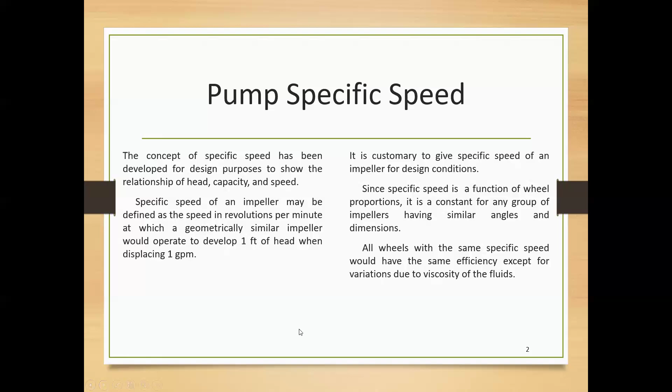There are two steps in the derivation of the specific speed formula. First, the speed of the impeller must be changed at constant diameter to reduce the head to 1 foot. Second, the dimensions must be changed at constant head or velocity to get a capacity of 1 GPM.

For a constant impeller, flow Q will vary as the speed N, and head H will vary as the square of the speed. So, N2 over N1 is equal to Q2 over Q1 is equal to the square root of H2 over H1. Taking subscript 1 to indicate the original impeller and subscript 2 the conditions after securing a head of 1 foot, N2 is equal to N1 times the square root of H2 over H1, and Q2 is equal to Q1 times the square root of H2 over H1.

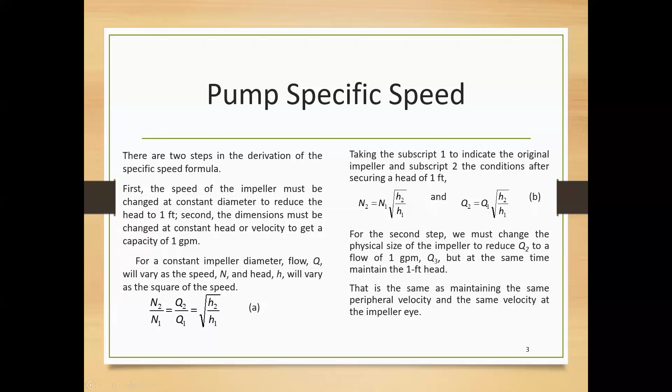For the second step, we must change the physical size of the impeller to reduce Q2 to a flow of 1 GPM, Q3, while maintaining 1 foot head. That is the same as maintaining the same peripheral velocity and the same velocity at the impeller eye. So the volume of flow will vary as area and as the square of the diameter. However, if the diameter is reduced, the speed must be increased to maintain an impeller velocity that will give the desired 1 foot of head.

Therefore, at constant head, Q2 over Q3 is equal to D2 over D3 squared is equal to N3 over N2 squared, where subscript 2 has the same significance as in equation B, and subscript 3 indicates the properties after conversion to 1 GPM. Substituting equation B into equation C, N3 is equal to N2 times the square root of Q2 over Q3.

So N3 is equal to N1 times the square root of H2 over H1 times the square root of Q1 over Q3. Remembering that Q3 is equal to 1 GPM and H2 is equal to 1 foot, Ns is the specific speed, Q is measured in gallons per minute and H is the head in feet for one stage. Q for a double suction impeller is taken as half the total flow, because it's per impeller, per suction. Okay? Right.

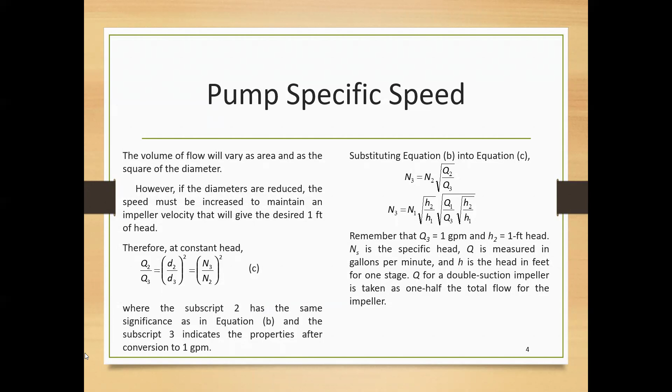So therefore, Ns is equal to N times the square root of Q over H to the 3/4. The specific speed for an impeller calculated throughout its head curve would range from 0 to infinity. Each type of impeller previously discussed has been found to have a range of specific speed in which it gives the best performance. Radial impellers have a specific speed of up to about 3,000 RPM, while Francis will go up to 4,500 RPM.

Take note of the numerical value of specific speed in English units for pumps. At that range, you know it's a pump. For turbines the range is different. So next. Mixed flow impellers range from the specific speed of the Francis wheel to about 10,000. For propeller types, the range is from 10,000 to 14,000 RPM. Okay, so that's for the pump.

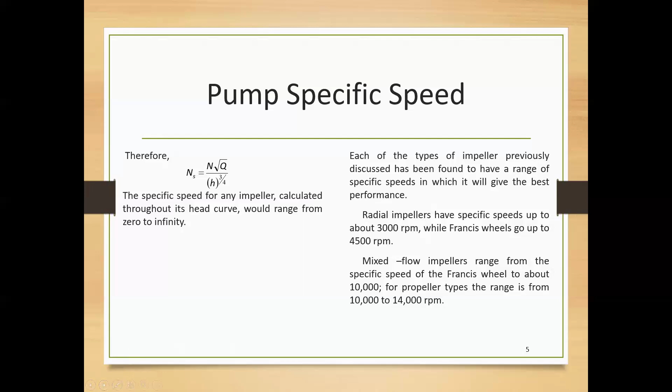Next is hydraulic turbine specific speed. For a turbine, specific speed may be defined as the speed of a hypothetical model turbine having the same configuration as the actual turbine, when the model would be of the proper size to develop 1 horsepower at a head of 1 foot. Okay, horsepower here. Note that the definition for a turbine is in terms of horsepower and head, whereas for a pump it is in terms of flow and head.

If the turbine runner is considered as a form of orifice, then the flow Q will be proportional to the square root of the net head Hn times the runner diameter squared. The power P is the product of head and quantity. So P is proportional to Hn times Q, proportional to D squared Hn exponent 3/2, or D is proportional to P exponent 1/2 over Hn exponent 3/4.

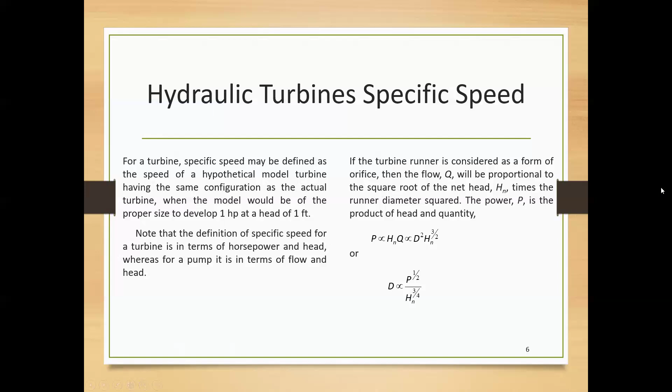Now, the ratio of peripheral velocity of the buckets to the velocity of the water jet is the dimensionless factor that may be called speed factor. In the case of steam turbines, this factor was called velocity ratio and designated as rho. Then rho is proportional to DN over Hn exponent 1/2.

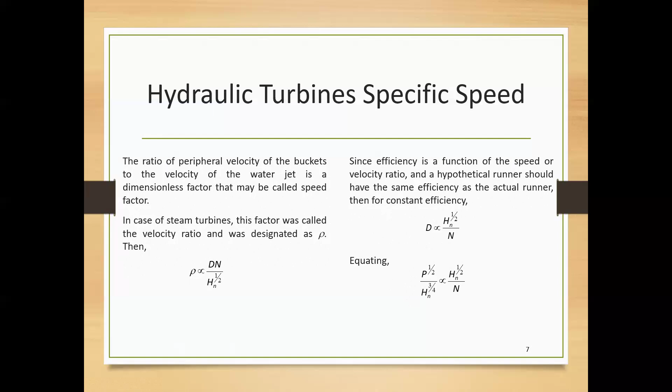Since the efficiency is a function of the speed or velocity ratio, and a hypothetical runner should have the same efficiency as the actual runner, then for constant efficiency, D is proportional to Hn exponent 1/2 over N, equating P exponent 1/2 over Hn exponent 3/4 proportional to Hn exponent 1/2 over N. Now, the constant of proportionality in this equation is the specific speed. Ns is equal to N P exponent 1/2 over Hn exponent 5/4.

The specific speed for a hydraulic turbine is usually taken either for fully open inlet gates at design head or at the point of maximum efficiency. Since the actual head on the turbine may fluctuate with river flow, design head is usually selected as the weighted average net head, weighted on the basis of kilowatt hours generated. Suitable combinations of speed, horsepower and head for various runner designs are related by the concept of specific speed.

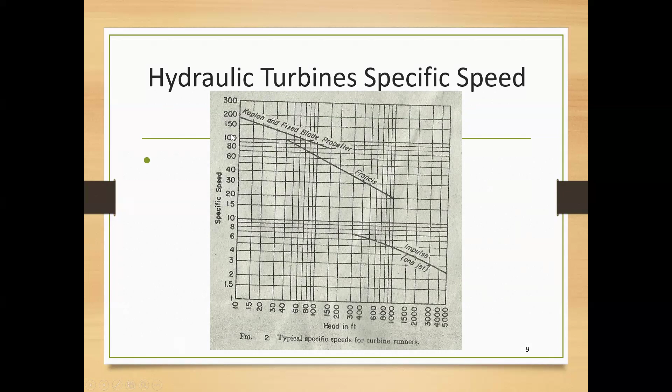Figure 2 shows typical values of specific speed for three types of runner operating at sea level. So here it is: Kaplan and fixed blade propeller, Francis, and impulse. For very high head, low flow, low specific speed, impulse. Normally, for low head, Kaplan, with high specific speed. So, that's our figure.

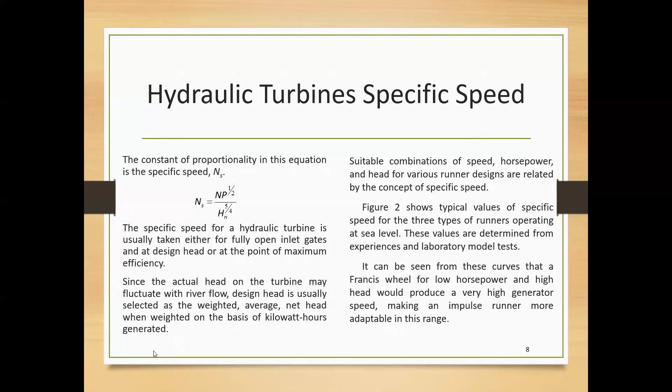These values are determined from experience and laboratory model tests. It can be seen from this curve that a Francis wheel for low horsepower and high head would produce a very high generator speed, making an impulse runner more adaptable in this range. So this is the end of this topic.